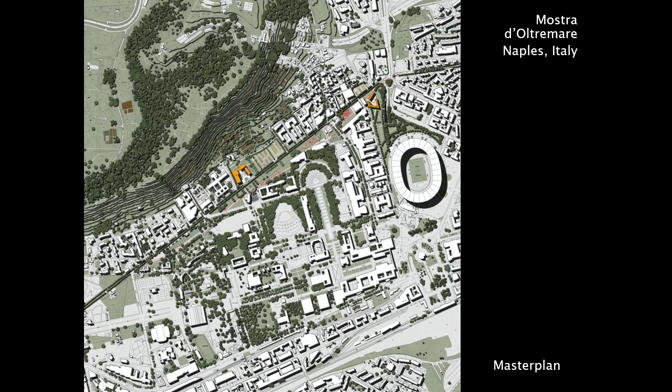But instead, this urban axis had several potentialities that could really be the spine on which to inscribe a series of small interventions that can transform that neighborhood.

So the idea of this green linear park is to design a boulevard for slow mobility, mainly public and pedestrian mobility.

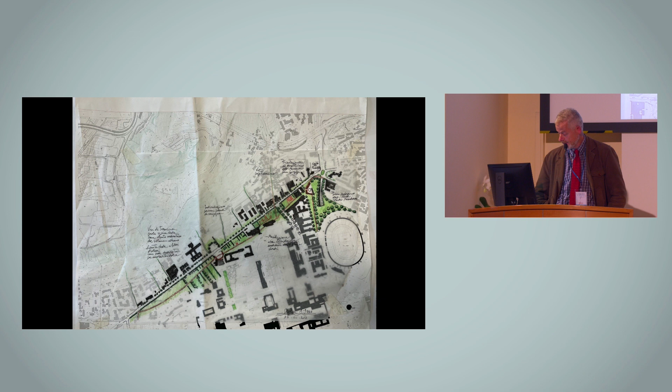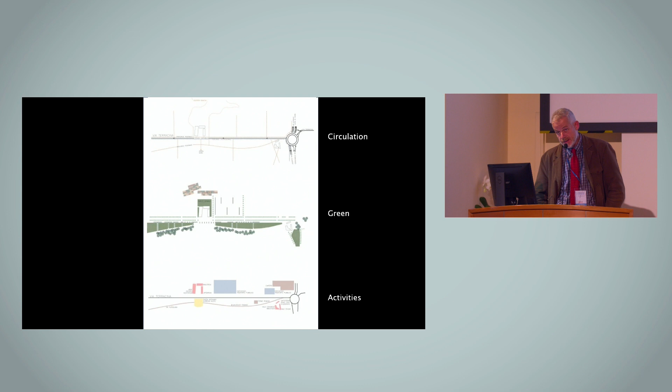We designed a series of events occurring along this street. There is the Roman Neapolis-Puteolis street that connected Neapolis to Puteolis. There is a mausoleum, there is a Roman thermal bath, but this neighborhood also needs green spaces for the community, and facilities where the community can recognize and meet themselves.

This is a general bird's-eye view of a partial section of this spine, which should have elements like scope one, the transforming of a former farm into a place for students. Nearby there is the Polytechnic School of Naples, so they need a place for dorms, a cafeteria, and study rooms.

Instead, along the green spine, there should be rethought a series of musealization areas, like the thermal bath or the mausoleum.

Where now there is an abandoned area with some slums, with some temporary constructions, we thought this place should be important to design a core area like a modern forest of the town.

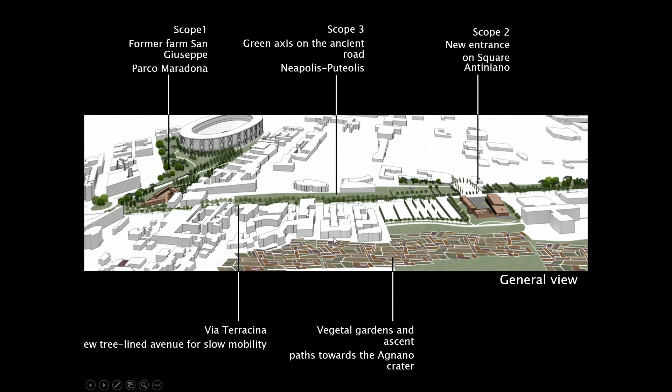A forest that should be the pivot area on which to open a series of streets on the hillside, where there were green vegetable gardens that are now abandoned. We call it urban orti urbani, urban vegetable gardens.

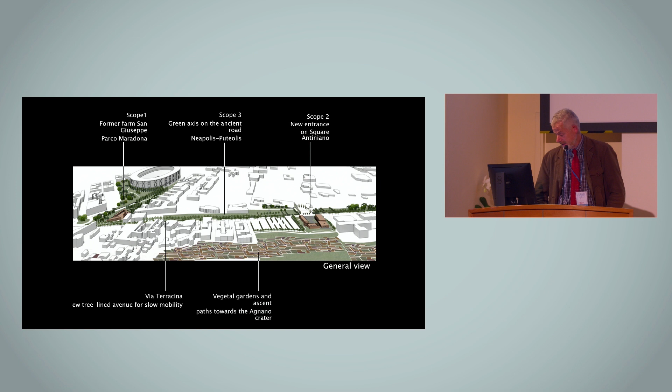In Italy there are similar boundary areas that are now giving back to citizens small plots of green, where they can cultivate vegetables or just enjoy being outside. This is Via Terracina.

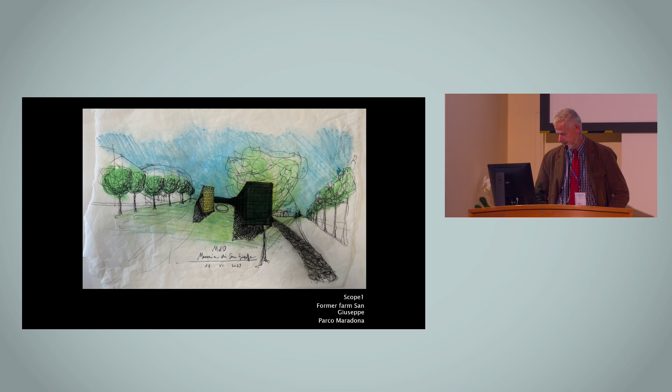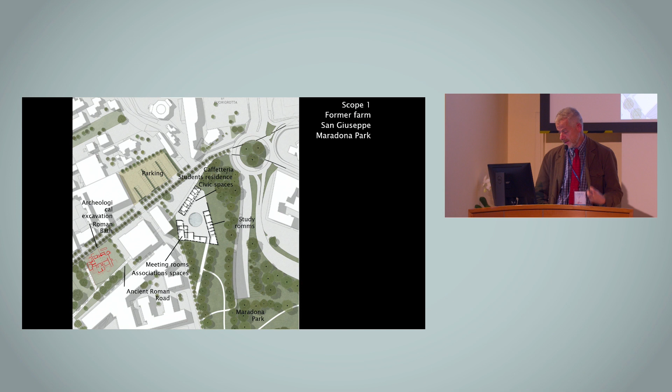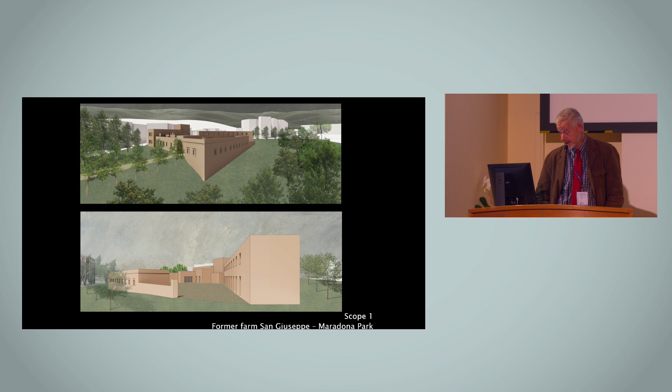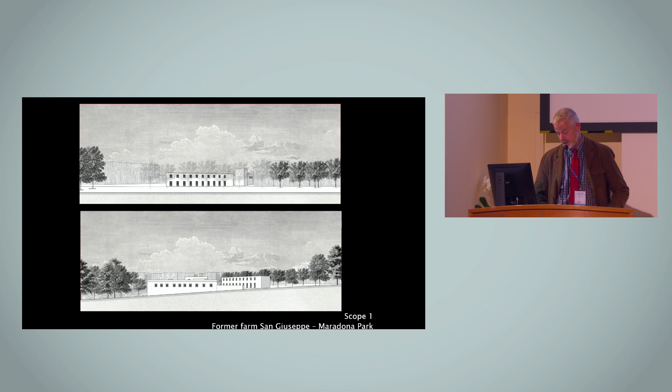Here are some views of the new park that we call Maradona Park, because we are near the soccer stadium, the Maradona Stadium. This neighborhood doesn't have public green space — our towns in Italy don't have that much green space — so for the people who live in that area, it's an important issue.

This is the first idea for the square on the opening, the former north entrance to the Mostra d'Oltremare, the exhibition of the overseas. There was an interesting project done by a Neapolitan, one of the few female architects of that time, named Stefania Filo-Speziale.

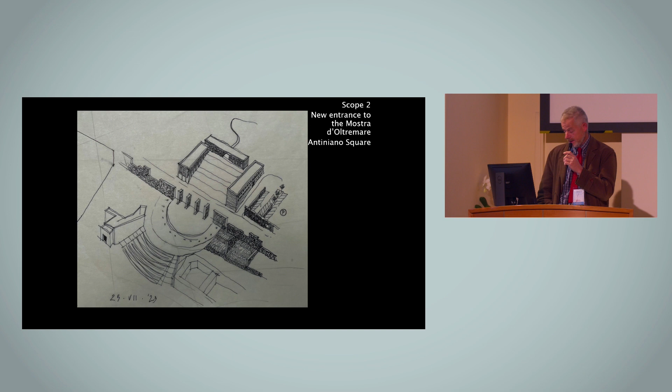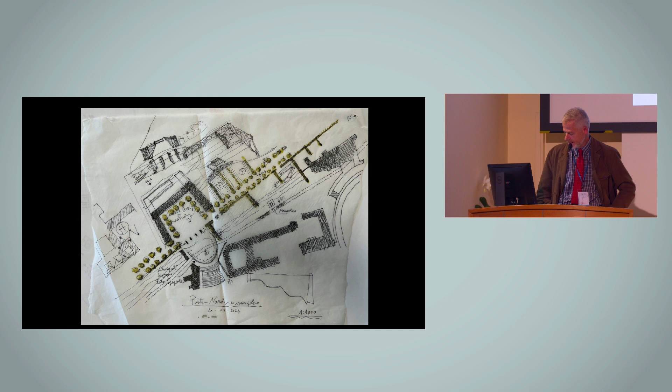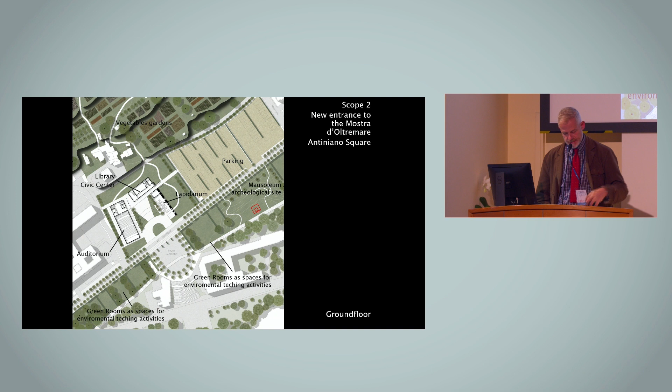There was a very interesting site that was destroyed, not by the war, but by human stupidity — Italian stupidity, you could say. So in our project, we decided to bring back the memory of that entrance, which was like an exedra, but using vegetation, greenery, and trees to bring back and line out the opening.

In this area we thought of some civic activities, like a lapidarium, a library, or an auditorium, plus rooms for meeting people, for the community to gather.

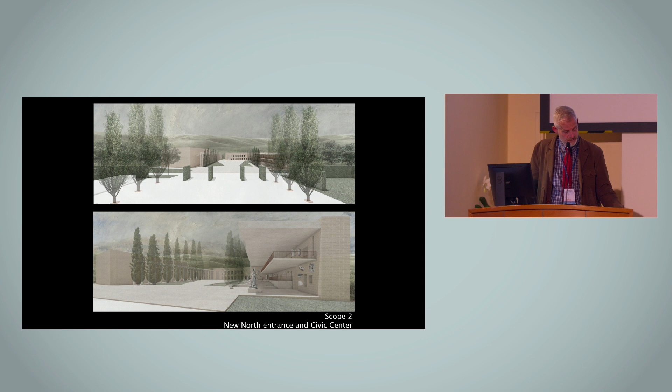So we think that with this project, as I told you before, we try with a simple green spine that should be the structure of new events, not using megastructures, not destroying the pre-existing, like the professor before me spoke about the importance of using what came before, in order to try to give meaning to the place where we live. Thank you.